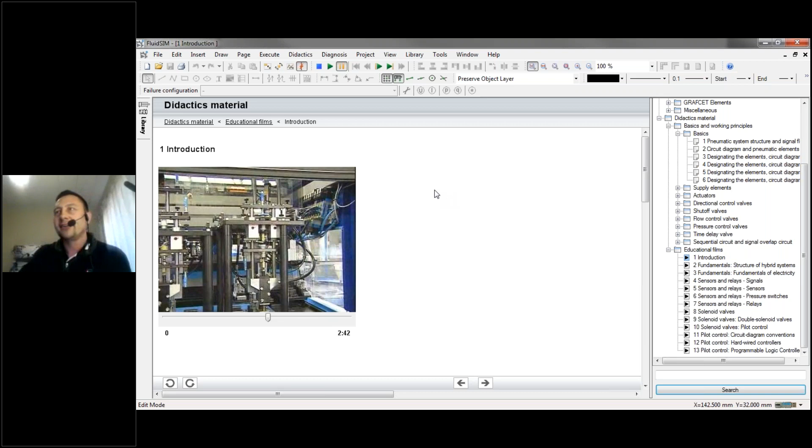Okay, Davi or anyone, just give me some heads up that you can see my screen, my video. We can see your screen and your video. Okay, thank you. So here we go. I'm going to play. Just have a look. I just want to start from the beginning. There we go. Is the audio okay? Yes, the audio is excellent, Sean. Thank you.

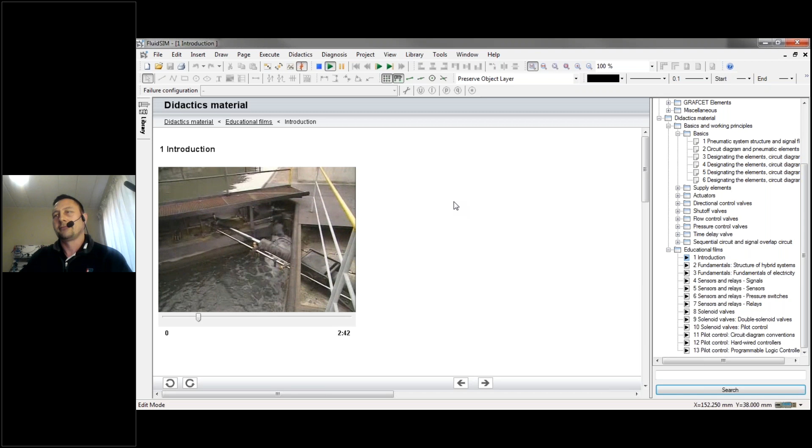What does an automatic packaging machine and this lock have in common? Let's take a look. Huge forces are required to open and close the lock gates. Force is required in two directions. Hydraulic drive is the right solution. The lock gates and the control room are far apart. This means that control signals have to be transmitted over a large distance. But a hydraulic pipe is not suitable for this. Electrical control signals, which travel via electrical cables, are the right solution here.

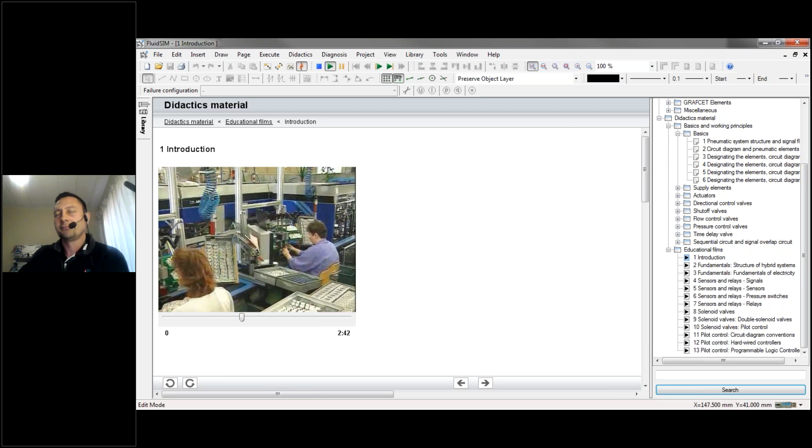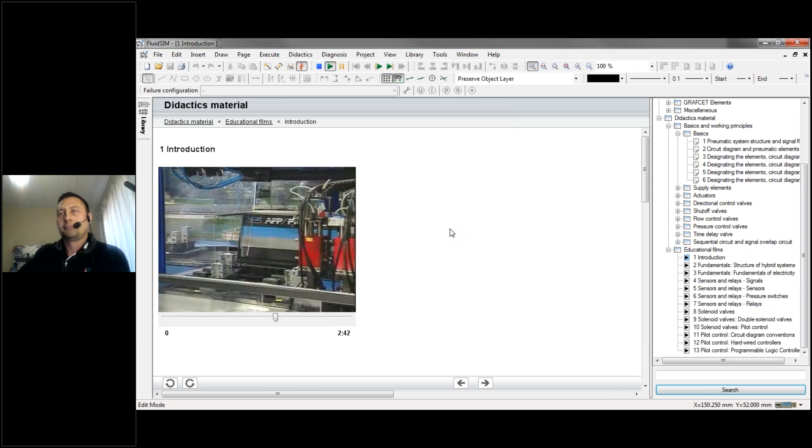In the case of these complex automatic assembly machines, it is not distance that is the primary argument against pneumatic control of the valves. In this case, it is the many control functions required in order for the entire complex program to execute. Here, too, electricity has been selected for signal transmission because it is simply more manageable. And because electricity is a prerequisite for the use of electronic open and closed loop control systems. And it allows a system to be linked to the company's data processing system.

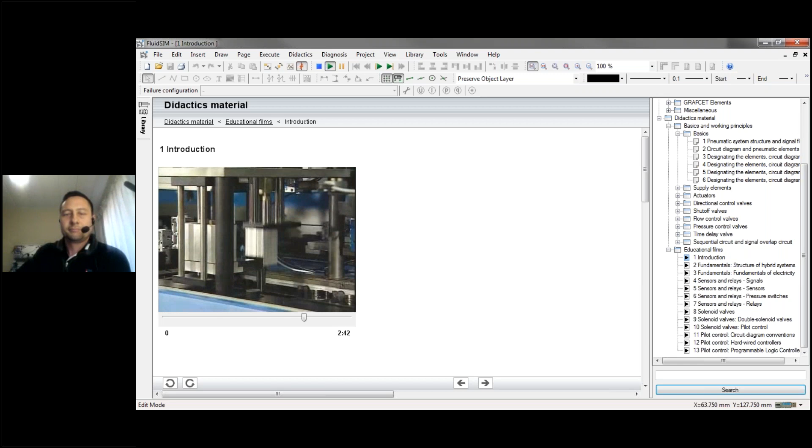In that case, why use pneumatics at all, if electricity is there anyway? Well, pneumatic drives allow linear motion to be achieved much more simply. And fast cylinder speeds can be achieved, resulting in short cycle times. In these examples, the control energy is not the same as the work energy. That is why they are called electro-pneumatics and electro-hydraulics. These are so-called hybrid systems.

Okay, so that was just a video to get you guys to understand where pneumatics are being used. So it's in industry, to automate your machinery and to make money for the companies, because a company exists to make money and to help the community. So basically I'm going to show you quickly a slideshow, and we're going to go through some of the basics that you guys need to know as you are just being introduced to pneumatics.

Having a look at the next slide of the slideshow, we can see air generation and distribution. There are always a lot of factors that need to be considered when designing and installing your systems, like storage requirements and air cleanliness, as there are many different levels of air cleanliness. It depends on your environment and the type of factory that you are in, and that determines the requirements for cleanliness, whether it's a pharmaceutical company, an FMCG or another type of company.

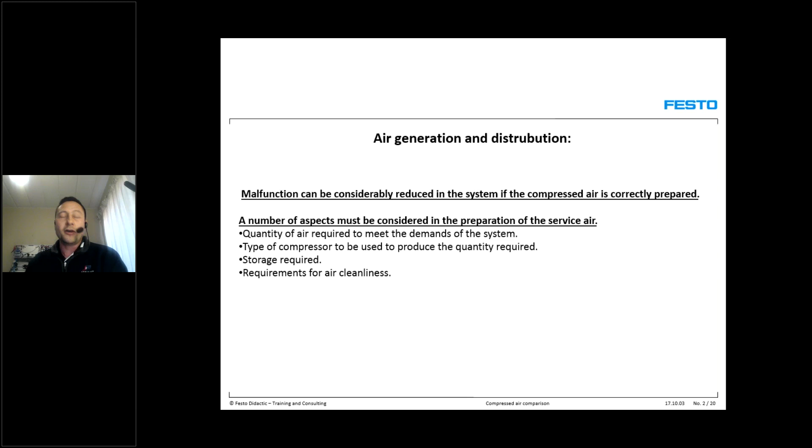Okay, so pneumatics by itself, if we just think about pneumatics, we are using compressed air to do work. We are compressing the air, and that compressed air we use to perform work, and to do it at quite high speeds.

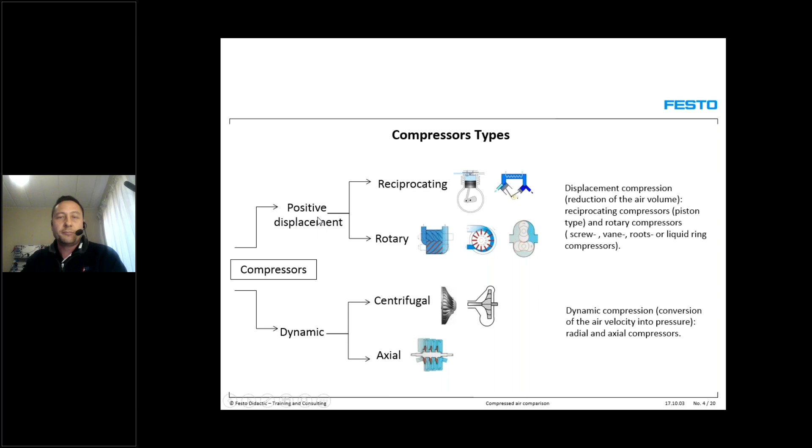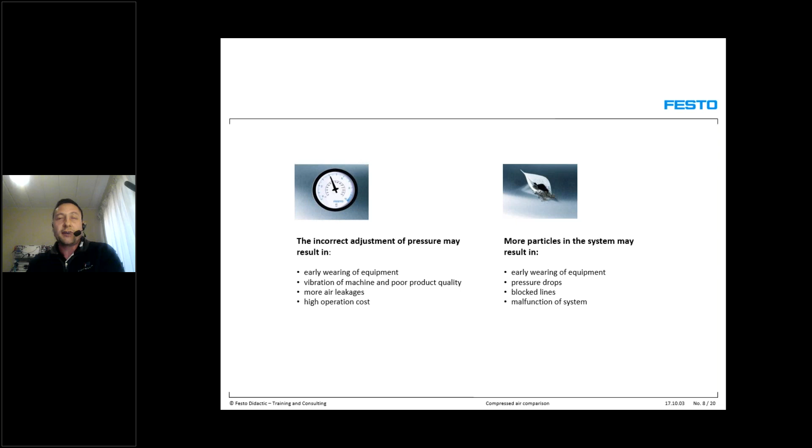There you can see it - the pressure should be correct, the particles as low as possible. You only need to allow the number of particles which is correct for your class of air, and then also you need to make sure you remove all the condensation, and lastly make sure you do not oil your system unless it should be oiled. There are certain rules that you need to keep to, to make sure you only add oil into the system when necessary.

We also cover that in our basic pneumatic course. So this is an air service unit.

Now I would like to show you these parts in practice so you don't just see some photos, but actually see it for real. Okay, so here's our air service unit. It's usually made up of a couple of components. The first thing on the left hand side, you can see there's a filter, and then something to remove condensation.

For our filter and our dust condensation, I'm going to bring in another camera to show you our unit so you can see. And then also the second thing we have here is a pressure regulator. In this case, it's a three-way pressure regulator with a gauge - there's our gauge as well.

And then thirdly, we have the lubricator, which is used for lubricating the system. We put all of these together and combine them, and then it forms one complete unit like this. If we add these up into a little square, there's our new symbol - this tells us the filter, the pressure regulator and gauge, and then the lubricator. So there we go, those are some of the components you would see in pneumatics.

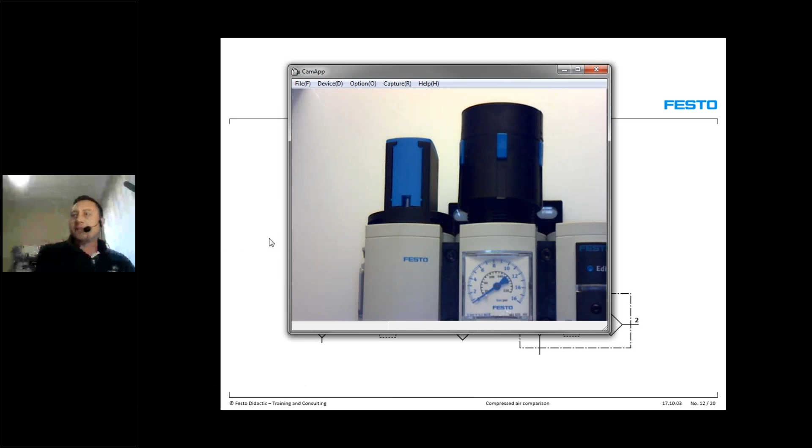If I can quickly show you my screen here - there we go. Okay, so this is just a practical, actual component here. This is our on-off valve that we have on this side. Here's our pressure gauge, here's our pressure regulator at the top.

There's a pressure switch. In this case, we have some extra units here with a branching module, and then we also have a filter at the bottom here. Okay, so in here we will replace the filter insert.

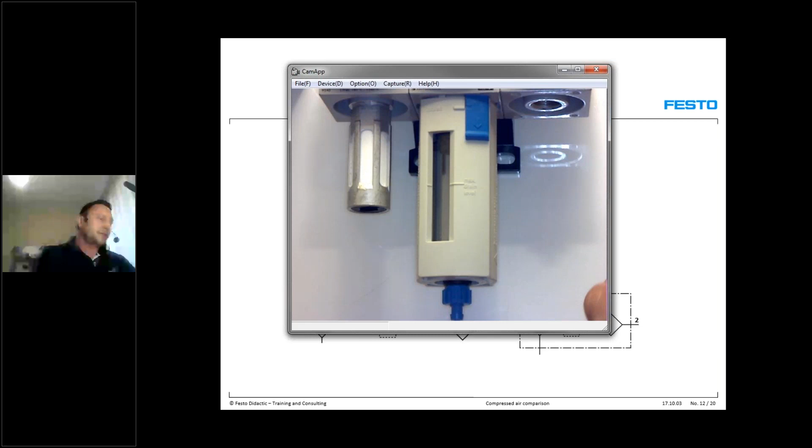This side we also have a silencer. So this is basically an air service unit that you would see in the field.

Okay, fantastic. So let's have a look at some of the details about some of these components that's actually being used in these air service units.

We go to the first one, the adjustment of pressure. This is very important. Two questions you should be asking: what is the correct pressure for the system? Like I already said, the lowest pressure that you can operate smoothly at, that is the correct pressure.

The second thing to look at is the correct flow. You need to make sure that the size of your regulator is correct and that the flow rate is correct so that it will actually allow it to pass through to the system.

Remember, if the flow rate is too low, then your cylinders would have problems if more than a certain amount of cylinders start to move at the same time. We do not want to have that problem. We also need to make sure that we have a constant flow all the time to our system.

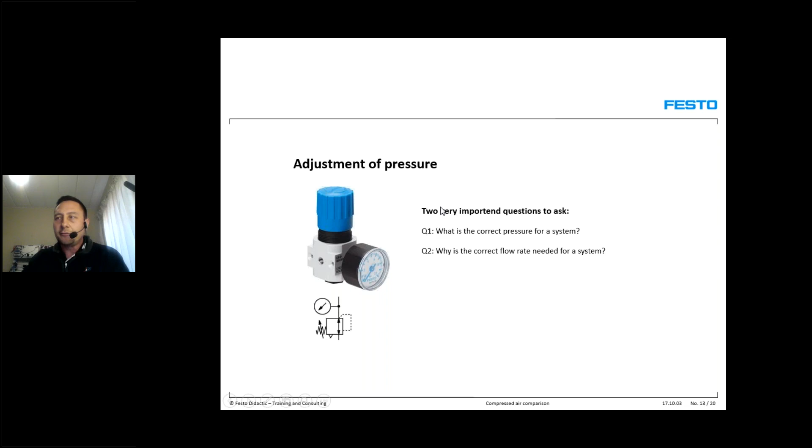So these are the two main questions you need to ask when installing your pressure regulator or doing the settings. Here's just some examples of what they look like in action in industry. Just different types, and you can see they all look different.

Then the next thing I would like to show you is some of the filters that we can find in industry. These are the five main filters that you will see in industry, from number 1 up to number 5.

The sterile filters are very small. They are used for bacteria and viruses, as you can see, and that's actually a whole new industry by itself, just working with these filters.

But for pneumatics, basically, you usually would start with 40 microns, then you would go to 5 to 1 micron, and then you would go to a microfilter, and then active carbon. So you start on the left-hand side and work your way downwards as you move through your system, through your distribution system, to get to your actual working components and your valves.

Okay, so usually this is the 40 microns, and then this is the 5 to 1 micron. This is a 0.01 micron, and then this is much smaller.

I usually make some jokes about it and say, if you have a factory that makes chips and flavorings, and it has an odor, and your employees start to eat your food, and they eat the profits, then you need to add some active carbon filters to make sure they do not get hungry while they are working on your components.

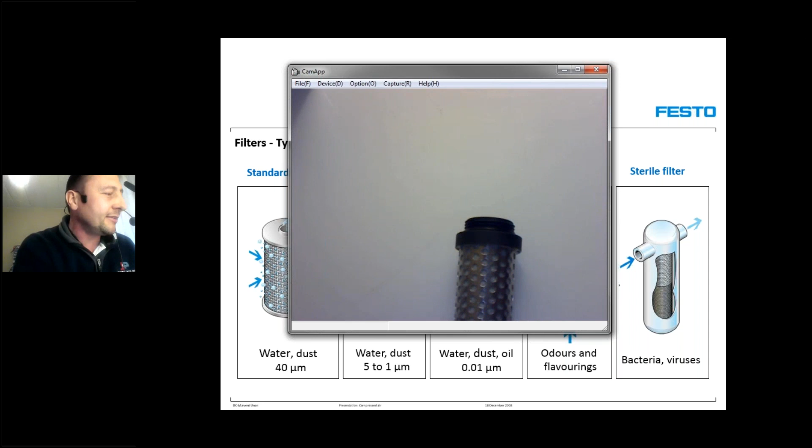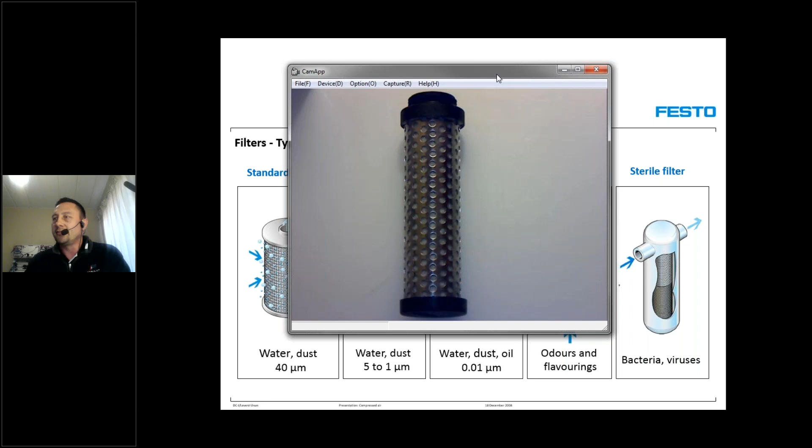But just to make it a bit more practical, I want to show you some filter inserts that we have here. This is the active carbon filter. Let me just get it in. This is the one in the back here on the right-hand side. This is the active carbon filter that we have here.

Then we also have a look at another one. Let me just close it a bit here. Here's another one. This is a fine filter that you see here.

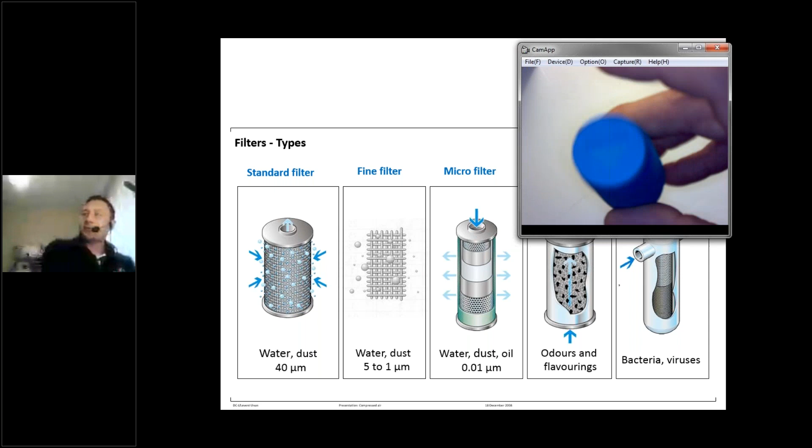If on the bottom, you will also usually be able to see the size. In this case, this is a 1 micron. It's written there at the bottom. You cannot see the camera well, it's a bit dark here at this point, but it's 1 micron, it says there, and this is your fine filter.

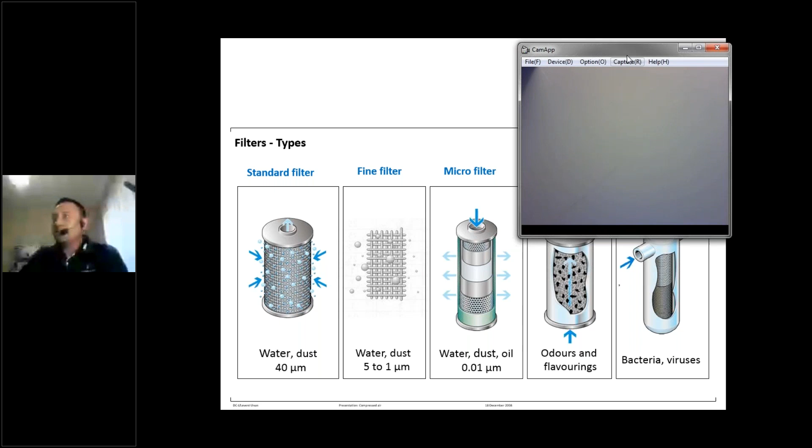Then we also have a micro filter. It looks a bit the same, but if you actually hold it in front of you, you would see it is more porous. This filter insert is more porous, and this is actually the micro filter. So yes, this is just some examples of the filter inserts that you can see.

Okay, if you have a look at the next slide. And like I said, we only have an hour and a half here to talk, so we can't tell you all the ins and outs.

We would like to spend more time with you to actually show you everything inside out.

Okay, so when to change a filter? This is usually a good question that we find in industry, and most people should know, but they don't always know: you should actually install some indicator for pressure drop. If there's a pressure drop over your filter line, it means your filter is blocked. So if you have a high pressure coming in and a lower pressure leaving the filter, then you actually have a problem. Then you need to start replacing your filter insert. Otherwise, your filter insert will become more blocked and clogged, and that will cause more problems downstream in the system.

Okay, then we also have the lubricator. Like I already said, there's a certain type of oil that you're going to use in a lubricator. And if we look here, this is a hydraulic oil with that viscosity. You can write it down now if you need to. If you don't know, please write it down. It's 32 square millimeters per second. And so that is the thickness of the oil. So the oil viscosity should not be anything else but that. So please make sure your oiling is done correctly with the correct oil.

Also, the other thing I mentioned earlier on was that you need to make sure that when you're oiling, you're doing it at the correct time, and for the correct reasons. Please remember that most of the valves that you are buying these days are already pre-lubricated by the manufacturer, so you do not have to lubricate unless you meet certain conditions. Then you would need to add a lubricator as well.

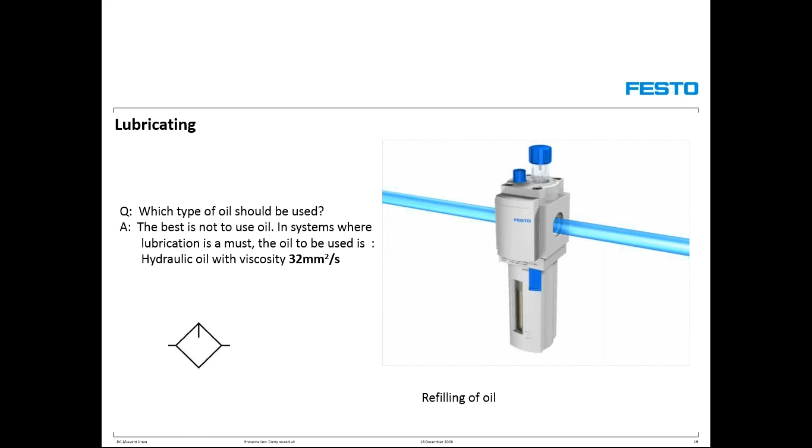But before you do that, I would recommend that you get one of our sales engineers to come and have a look at your system and make sure that you actually need to lubricate your system. Otherwise, if you start lubricating, you will have to keep lubricating it yourself.

Okay, fantastic. This is just to show you where you can actually adjust your oiling system. There you can see there's a plus on that side, minus this side. There's the way the oil will drop in. This is a chamber, and this is just to show you the lubricator from the top.

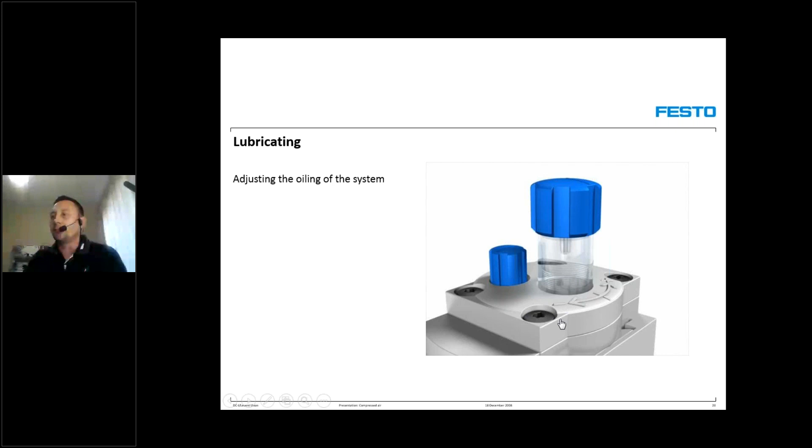Okay, then just some tubing and fittings. I'm not going to talk a lot about this, but just to show you some things. Of most tubing damage, as you can see, only 10% comes from mechanical damage. The rest is because you use the wrong tubing in the incorrect environments.

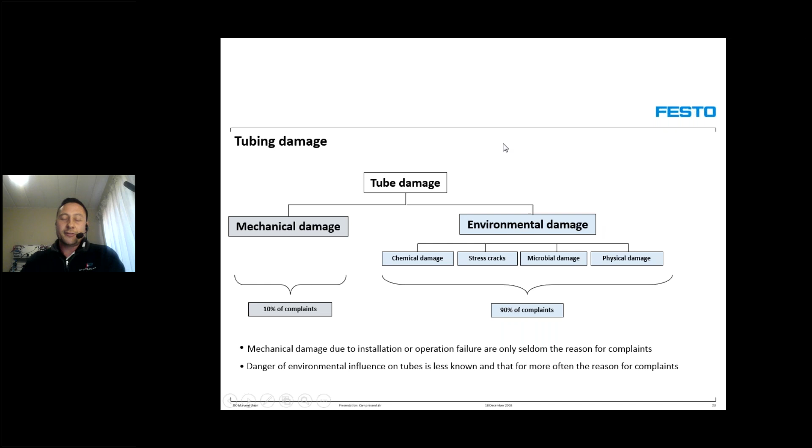So all of these are places where leakages can take place, and there is always a certain amount of leakage that does take place. But making sure you reduce the amount of leakages is a very good idea, because you would increase the profitability of the company.

And then there are obviously different ways to detect your leaks. In this case, the easiest and the cheapest way to detect leaks is to use a soap solution. You just spray it on, and you can see where the bubbles start to show, and then you know there is a leak.

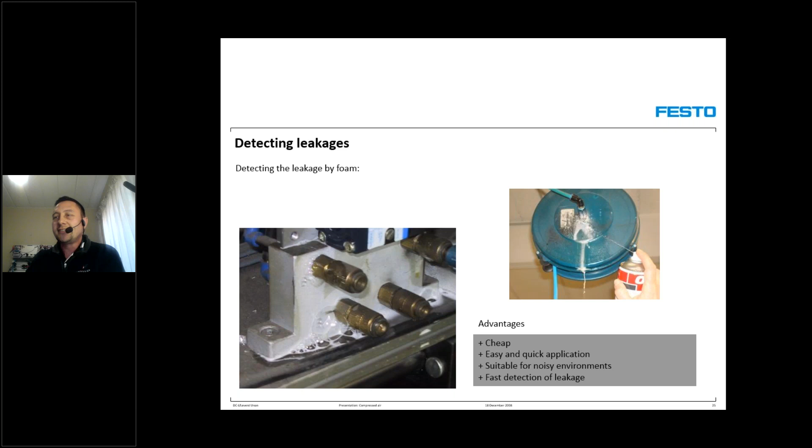Okay, so always remember to reduce the leakage. We do not want leaks in our factories. We want to make sure that we maintain a proper flow, proper pressure, everything, and without any leaks. The more leaks you have, the less profitable your system becomes.

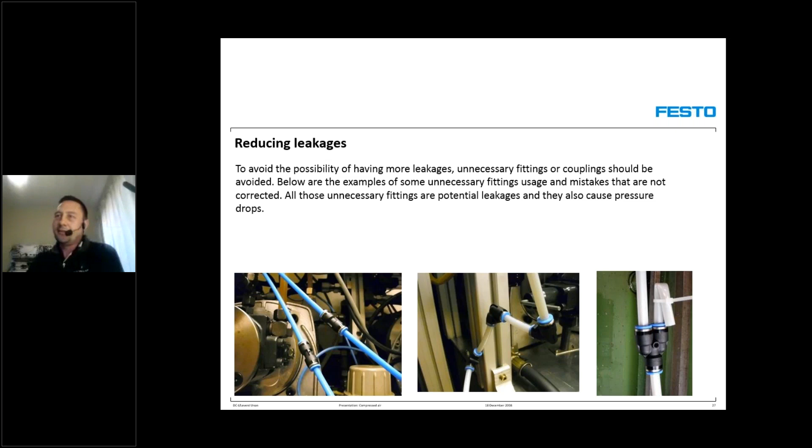Okay, fantastic. So let's have a look at some of the symbols, because we will be designing and showing you some components today as well, within the next hour or so. And so you need to know some of the symbology. Okay, so the first thing that you need to know about is the relationship that exists between pressure, volume, and temperature, and there's also a relationship that exists between force, pressure, and area. Okay, so the first thing, for volume and pressure, I would like to play a small simulation I have here.

Here we go. Okay, so pressure and volume. So you can see the pressure is at the moment low, and we have maximum volume. Okay, but as I bring this piston down, I'm going to start to put pressure on the container. I'm going to build pressure inside the container, and then there will be a pressure being developed. So let's quickly have a look. So there we go. So pressure and volume, they work together.

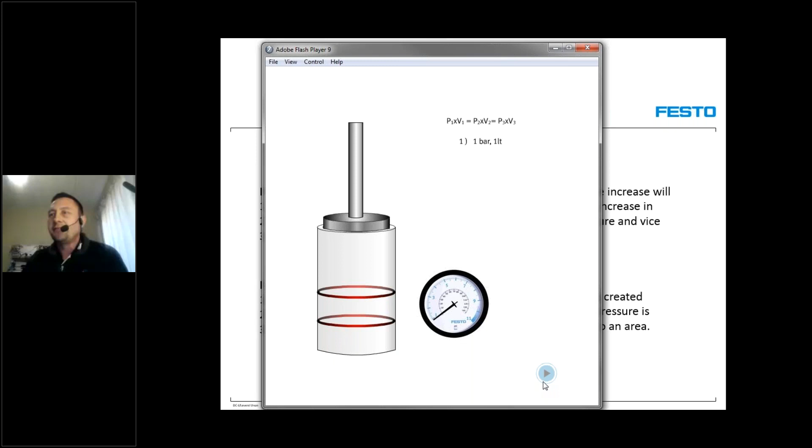Okay, so the first one, we have 1 bar being applied to 1 liter of volume. So you can see the pressure at the moment. Okay, so now let's halve the volume. So the volume is now half a liter, and you can see the pressure doubled. If we do it again, and we halve the volume again, now it's 1/4 of a liter, and we can see it's 4 bar. So you can see that the pressure went up proportionally as the volume decreased.

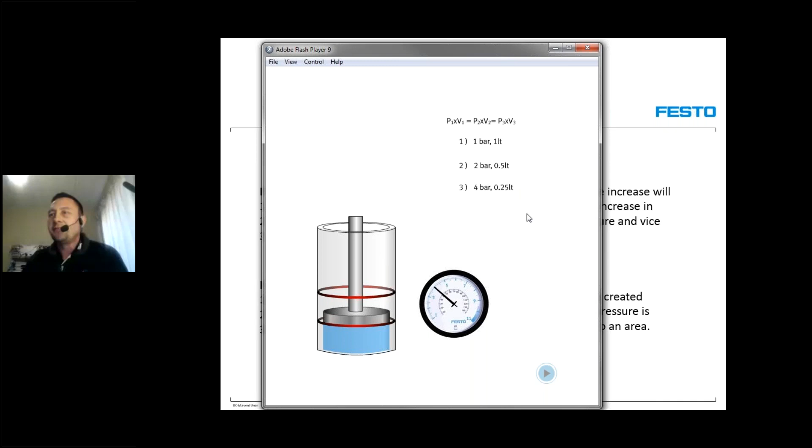So this is one of the main principles of pneumatics. And remember, we're using it to do work. Okay, but this is important to remember when you actually work with pneumatics, as this can cause some problems if you do not maintain this relationship. Okay, let me quickly show you another simulation as well.

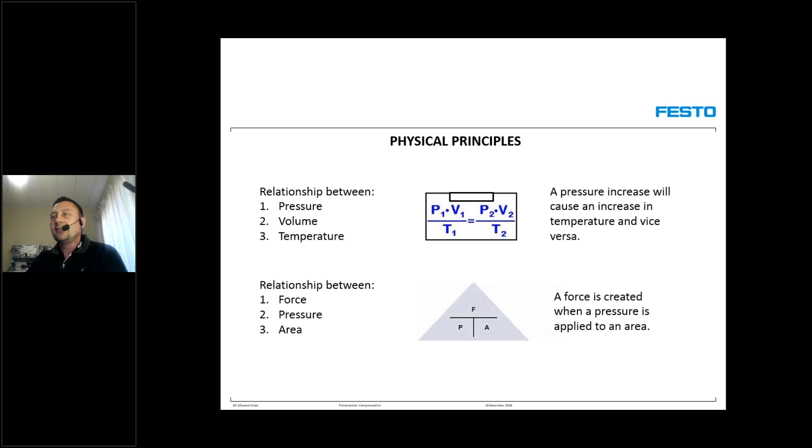Okay, so if we look at the second one, the relationship between force, pressure, and area, to create a force, we need to apply pressure to an area. Okay, so if we apply pressure to an area, then we will have a force, and a force can actually perform work. So in other words, if we look at the size of a cylinder, the larger the cylinder is, the more force we would have.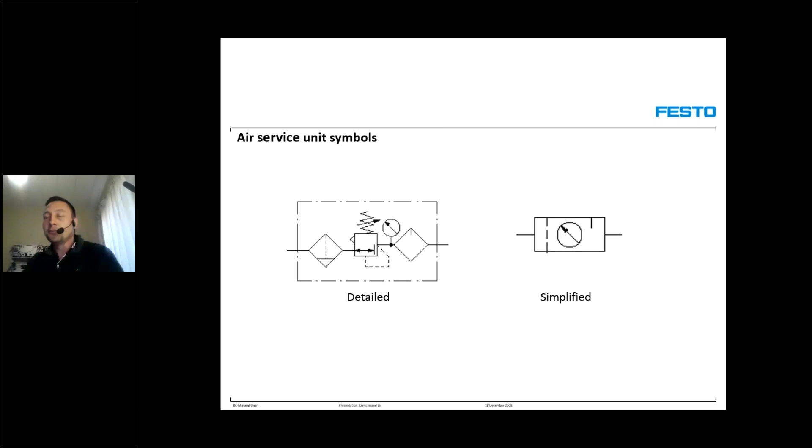But this is detailed. If you add more modules into your air service unit, then you would add more of the symbols. So this is the filter, this is our regulator with a gauge, and this is our lubricator. Remember, if you come for the basic pneumatics course, we will go through this again and in more detail as well.

Okay, so then we are also going to have a look at some cylinders today. We are basically going to look at the single acting cylinders. Single acting cylinders normally have a spring in the front area, and they return because of the spring force pushing against the cylinder, moving it backwards. A double acting cylinder, you can see, has got 2 ports. The single acting only has got 1 port.

So if I apply pressure here in the back, the cylinder rod will move forward and overcome the spring tension. Once I remove the air from the back, the spring will push the cylinder back to its original position. On the double acting cylinder, we have 2 ports. If I apply pressure to the back, the cylinder would move to the front. If I apply pressure to the front, the cylinder would move to the back.

Okay, so just to make that a little bit clearer so that you guys can understand, let me quickly get another simulation here, just to make it easy to see, because I know the mechanical guys like to see to believe.

Okay, so let me quickly bring you a double acting cylinder. There's a double acting cylinder. If I apply pressure from the back, the cylinder would move forward. If I apply pressure to the front, the cylinder would move back. Okay, so that's our double acting cylinder. Let me quickly see if I have a single acting here for you as well.

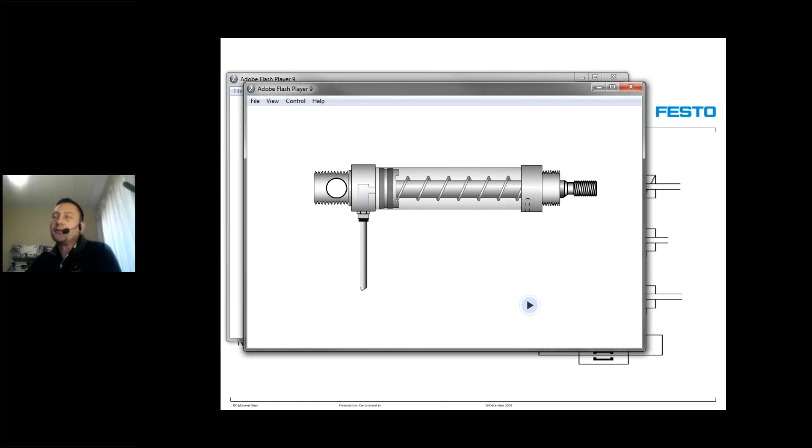Okay, here we go. Our single acting cylinder. You can see there's a spring in the front, and that's keeping the cylinder in the retracted position. Now if I apply pressure, the pressure in the back of the cylinder would overcome the spring tension in the front, and it would move the rod to the front. If I remove the air, the cylinder's spring would return it to its retracted position.

Okay, fantastic. So this is our single acting cylinder, which only has one port. The double acting cylinder has two ports. You can see one and another. Perfect. Then there are also other types of double acting cylinders available in industry. I'm not going to go into detail on these now, but the two we're going to be using today are the single acting and the double acting cylinders, just to build a few circuits and to demonstrate what you can expect to see in the courses as well.

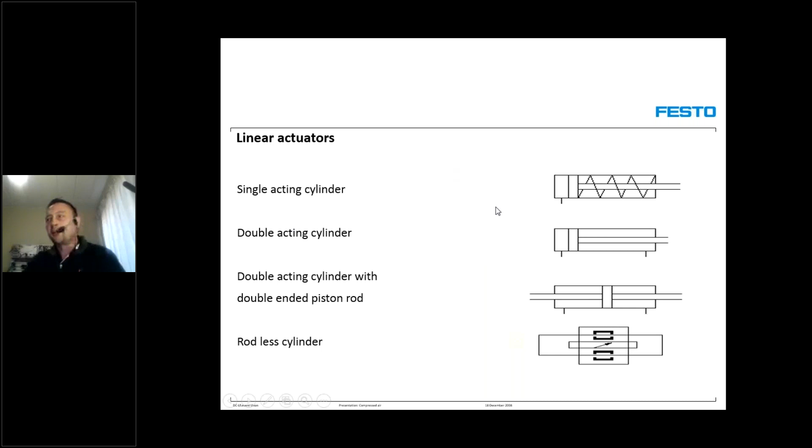Okay, so let me quickly see if I have a cushioning simulation for you. Is there any questions at the moment? Hannes, have we received anything in the chat yet while I'm looking for my cushioning here?

And this one, we won't be working with these today. But we will definitely be working with the double acting cylinders and the single acting cylinders that I'm going to show you. And we're going to play with that a bit.

Okay, then we also have exhaust ports. An exhaust port is what you would usually have on a valve, because we use the compressed air to do the work. After the work has been performed, the air should be released again. So to get it out of the system, we need to exhaust it back to atmosphere. Okay, so if we see just a little triangle like this, that means it's an exhaust port

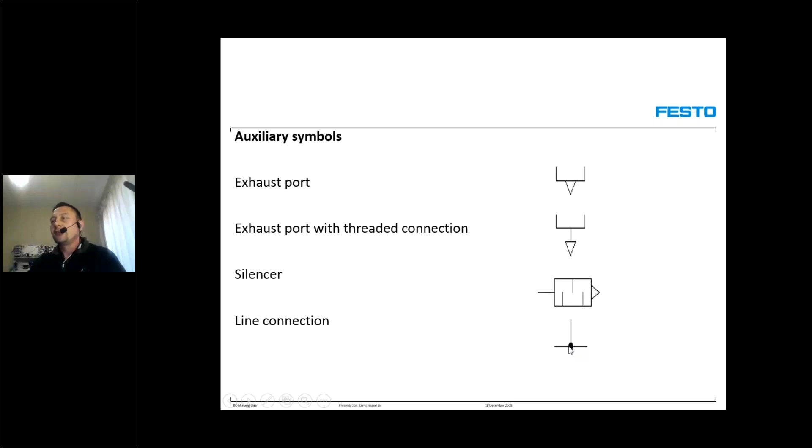Then the next thing you also need to remember is when you make line connections, to show that the line is connected, it means you're using a T-piece in this case, and that means you can connect 3 pipes to one node or one point, and that means you need to put a dot. If there's no dot here, it means the lines would be crossing one another. But if there is a dot there, the lines are not crossing, they are connected together using a T-piece or other type of component.

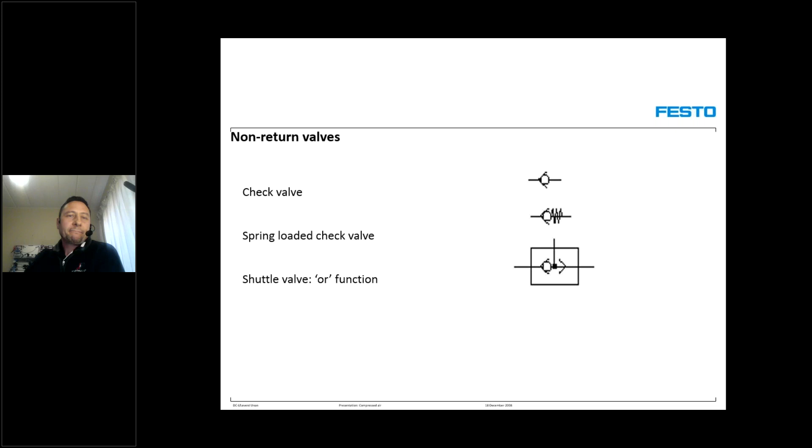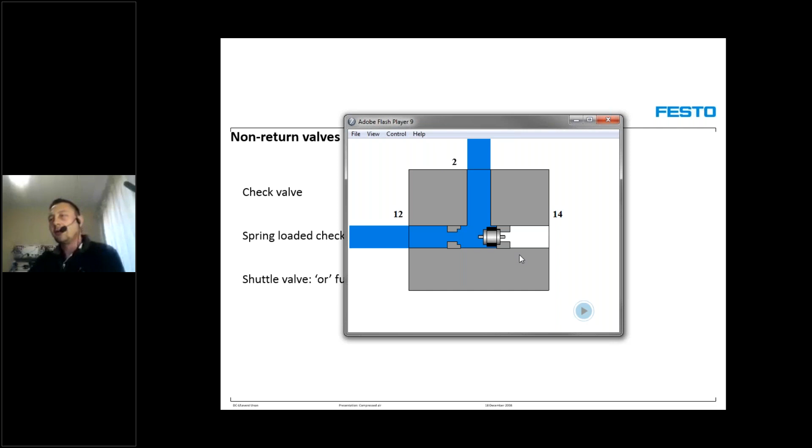Okay, just an OR valve, to show you: if we get a signal from the right-hand side, it will pass through to the output. If there's a signal coming from the left-hand side, it will pass to the output. And if you have two signals, the one with the highest pressure would pass through, the one with the lowest pressure would not. So that is our OR valve, or our OR function, also called the shuttle valve.

If we look at the next symbol, we've got the two pressure valve, which is an AND function, also called an AND valve. We'll also be using this in our basic pneumatic course, and there are a few circuits you'll build using them. The AND valve basically needs two inputs before you can have an output.

So this is our valve. If we get one signal from the right-hand side, it's blocked. If we get one signal from the left-hand side, it's blocked. If we get two signals from both sides, then one of the signals will pass through and the other will be blocked. So for this valve to work, we need two inputs to get an output. That is our AND valve. So one signal only would not allow output, two inputs would allow an output.

And we also use this in the basic pneumatics course, as well as this quick exhaust valve. There will be instances in pneumatics where you'd like to move your cylinder faster than the normal speed it returns or moves forward. For that reason, we'd use a quick exhaust valve, which would exhaust all the air in the cylinder much quicker to the atmosphere, so your cylinder can get rid of the air faster and move at a faster rate. That means you might save some production time on your machine, and time means money. So that's good for the boss.

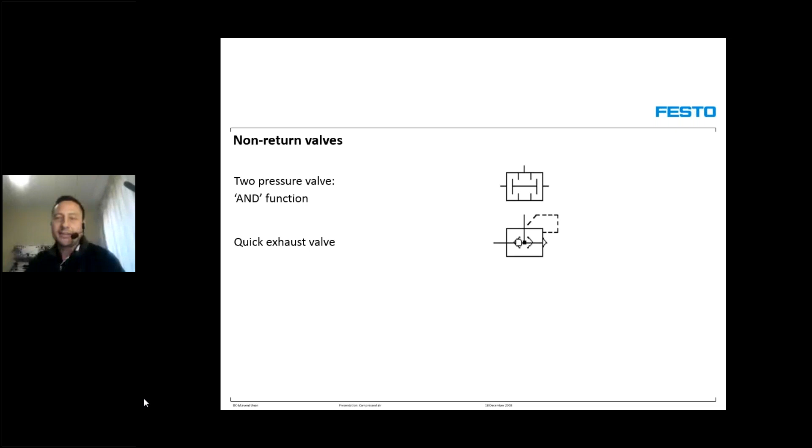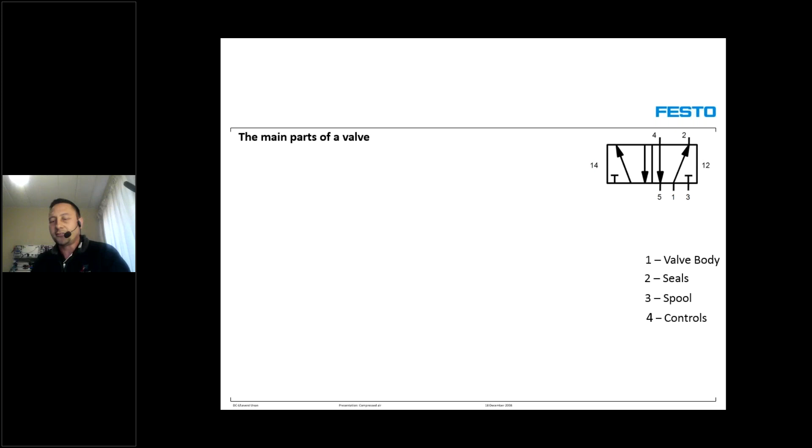So looking at valve construction, something also to remember is what a valve is made up of. It's got a few parts that are put together to actually construct a valve. And the first one is the valve body itself.

In this case, I'm going to explain this to you, we'll have a look at it. This is a 5/2-way valve. The 5/2-way valve has 5 ports, and you can see there are 2 positions, one on the left and one on the right. So there are 2 squares, meaning 2 positions, 5 ports: 1, 2, 3, 4, 5 ports, and 2 positions, 2 squares.

So you'll have the valve body for the 5/2-way valve, for instance, as an example, and then you'll also have seals. The seals would actually create chambers before each port. So these are the ports: 1, 2, 3, 4, 5.

It's the same ports that you see here. This is a symbol for the actual valve. You would have the seals, and you would also have a spool. This part is the only part in the valve that actually moves and makes a change, so that the air can change direction. In this case, if it's a 5 two-way, it would change between 1 to 2, sending the air from 1 to 2 or 1 to 4, exhausting 2 to 3 or 4 to 5, depending on the direction that your spool moves to.

Then you also have controls, which is number 12 and number 14, which most people do not know. They just think it's a number, but 14 actually tells me I'm going to connect - if I put pressure on the left-hand side here, I'm going to connect number 1 to 4. If I put pressure on number 12 here, I'm going to connect number 1 to 2. So that's actually what 12 and 14 means. It's not 12 and 14, but it tells me 1 connects to 4 and 1 connects to 2. That's actually what it means.

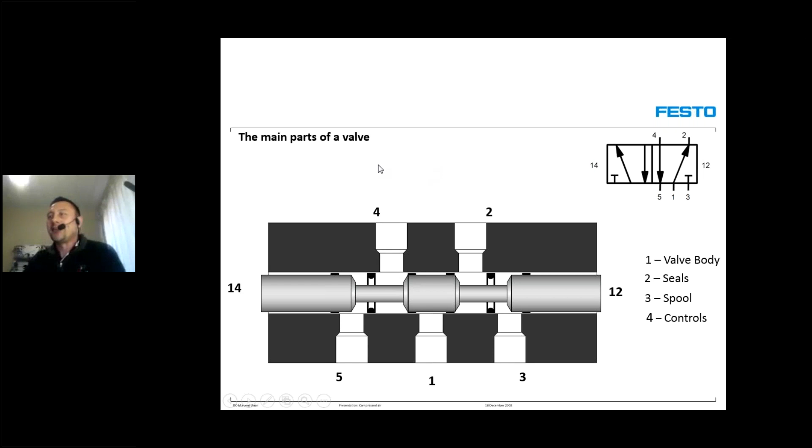I'm sure you guys have already learned something today. There are also a lot of other ways you can actually actuate your valves. On the left-hand side, we have all the manual methods that you can use to actuate your valve. In general, you would use this symbol, which means it can actually be any of these - it's just a general symbol.

But if it's a push button and you want to be specific, you can use these other symbols specifically to state exactly what you are using. This is just a general manual actuation symbol.

Secondly, for the mechanical actuation, we normally use a spring return as a return on a valve. So once the air disappears on the left-hand side, for instance, the spring would return it on the right-hand side. I will play you some simulations now just to make this clear.

Then also what you might have is a mechanical pin. You need a mechanical actuation or mechanical contact, actual contact from the cylinder to push against the pin to open or close your valve. The same as the roller - you might have a roller which might be on a roller limit switch or limit valve, and that should open or close your valve.

And if you're doing electric, or you're going to sit with us on the electro-pneumatic course, then this is one of the things that you will also be using - it is a solenoid, and there are special types of solenoids as well available.

This is just a basic symbol for pneumatic actuation. So this is to show that if I apply pressure to this side, then it's going to send pressure to my valve here. But we will have a look at that quickly.

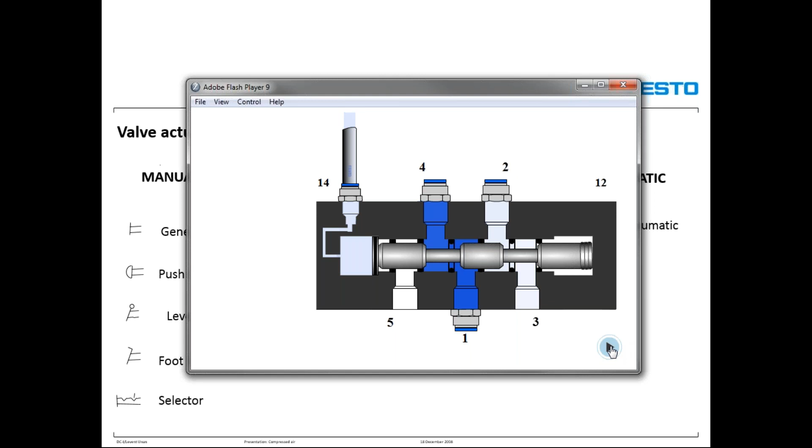So let me just release the air, and there you can see the spring takes over, which is number 12, and it connects number 1 to 2. So air will flow from 1 to 2. If I apply pressure to 14, I connect pressure from 1 to 4, port number 1 to number 4. That is just to give you an explanation of what we are talking about at the moment.

Let me just see if I have another valve here, just without any springs - a normal 5 two-way valve. There we go.

Okay, so from the left 14, I'm going to connect number 1 to 4. I connect 1 to 4, but I exhaust 2 to 3. Okay, if I give a signal to number 12 and I take it away from 14, let's see what happens. I connect number 1 to 2 because it's 12, and I connect 4 to 5. So 4 exhausts to number 5, and pressure is applied from number 1 to 2.

As a general rule, we usually say number 1 is your pressure, number 2 and 4 is your working lines, number 12 and 14 would be your signal, your pilot control in this case, and number 3 and 5 would be your exhausts. So 1 is pressure, 2 and 4 is working lines, 3 and 5 is exhaust, and 12 and 14 would be the control.

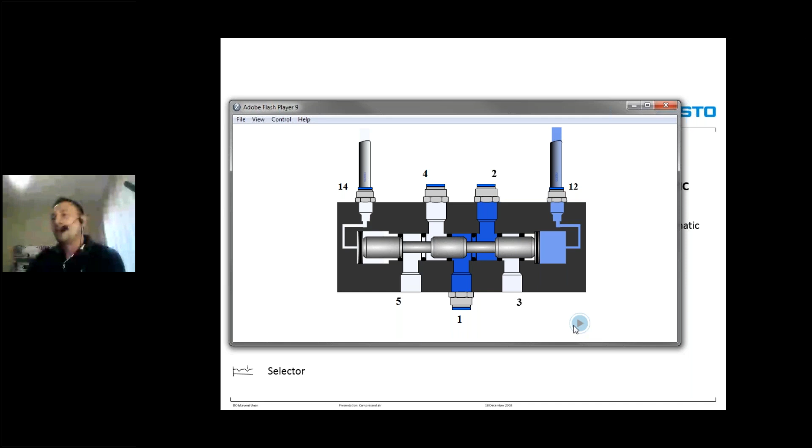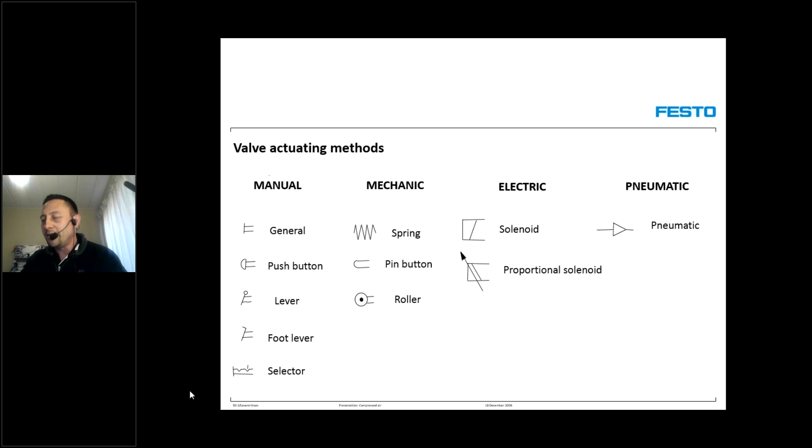And that is basically how you can look at a valve and what the valve consists of. Okay, so if we look at the next slide, just to help you a little bit, and if you have a pen and paper with you, you can make some notes. I know there's a lot of information we can give you, but we are a bit limited on time today.

Number 1 here, you can see we always look at the number of ports. Let me bring in a valve again, then we can have a look and compare it to what we see here. Okay, so here's a valve. How many ports do we see? It's 1, 2, 3, 4, 5. So that means 5 ports.

How many positions do we have? It's either the spring's position to push it into the left-hand side, or if I give a signal to 14, it will push it to the right-hand side. So there's one position, and there's another position. So there's 2 positions here on this valve. Okay, so we have 5 ports and 2 positions. That means a 5 two-way valve.

A 5 two-way valve. What is the condition of this valve? We will look at that as well when we look at our circuit, when we start designing. But in this case, this valve is a directional control valve. It's not normally open or normally closed, but it is a directional control, because if we had to connect this to a cylinder, it would either move the cylinder to the front to extend, or bring it back to retract.

Okay, so next thing we need to look at is the method of actuation. How do I actuate this valve? How do I get it to change the position? It is by means of direct pneumatic actuation. So I'm bringing in air. Remember, pneuma means air, okay? Pneumatic, that's where it comes from. Pneuma, pneumatics, okay? So pneuma means air, and when the air comes in, air will actuate my valve. So it's direct pneumatic actuation. So there we go, if the air comes in, I actuate my valve.

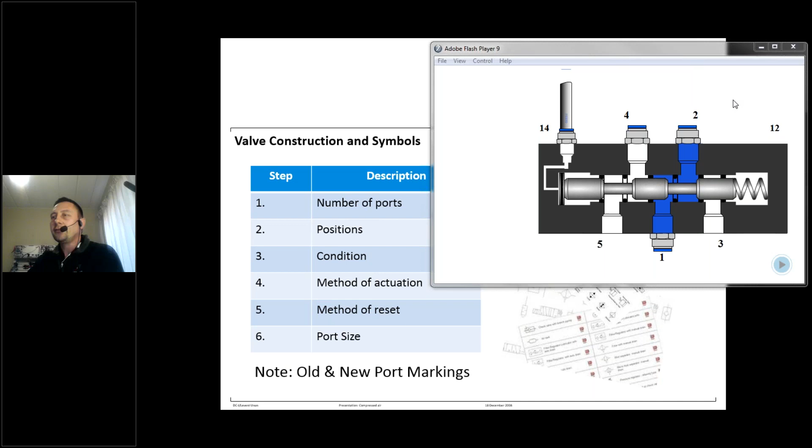So I would recommend you try doing that and you follow these rules. We do go over these steps again when you actually do the basic pneumatics course with us. Okay, so let's have a look at some of the circuits, just to have a look at some of the components that we're going to look at today, so that we can discuss them.

Okay, so I'm going to bring in my drawing program. This is called FluidSim. On Friday, we actually will be running this FluidSim introduction, so that when you come and do the basic pneumatic course or any of the other courses that we offer, you will have to draw circuits on FluidSim, our drawing package. So once you register and pay for the course, we're going to be sending you this package for free with a 3-month license, so that you can join us in class and do some practical exercises.

Okay, so this is our library. You can see there is pneumatics, there's hydraulics, a whole bunch of things that you can look at and work with. But in this case, we're just going to work with pneumatics. So first things first, we're going to get some cylinders. There are many cylinders to choose from and many different types available, and it depends on the application. But for our circuits, we're going to keep it simple and straightforward, build some different circuits and see what they do.

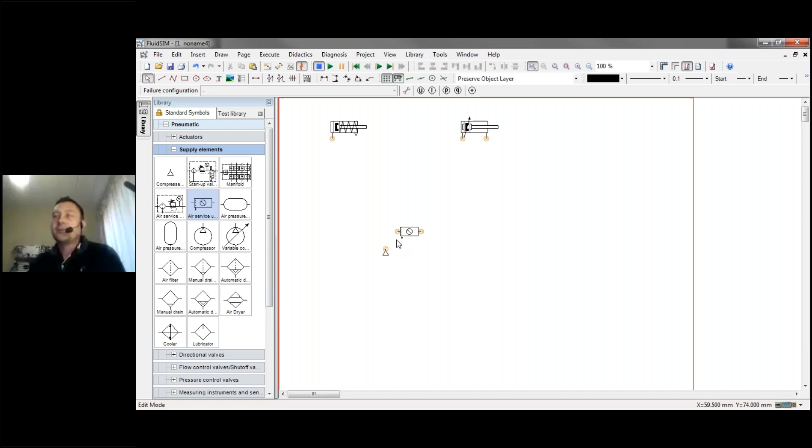So here we can connect our compressor to our air service unit. The compressor supplies the compressed air to the air service unit, which cleans the air, and then the output goes into your system of control. So if we look at this system here, this is a single acting cylinder, and if I connect this directly to the air service unit, once I start to simulate, you see, there we go. The cylinder moves forward, and that's it. There's no control.

We cannot control it unless we actually get ourselves a directional control valve. There are many different types of control valves available that you can drag in, and it depends again on your application. What do you want to do? So there's 3 different valves. Let's try the first valve. This is a two-way valve, and we're going to add it into our circuit. Let's work on the actuation method and the return. So let's give it a spring to return, and actuate it by a push button.

So let's see if this valve would work with a single acting cylinder. If I push the button, the cylinder extends, but if I let go, it still stays there. The question is why? The answer is because the air is still stuck in the back of the cylinder. It does not go anywhere. You built the pressure in the back of the cylinder, and it's still overcoming the spring tension, so the cylinder stays in the extended position. You cannot get it back.

Look, there's no way to get it back. So in this case, actually, it tells you that's the incorrect valve to use. Okay, so let's go and get ourselves another valve. So if we had to use this valve, let's see. In this valve, what do we see? We have a number 1, 2, and 3. On this valve, we only had number 1 and 2.

So on this valve, we had a two-way valve. Two ports and two positions. So that means number 1 is usually pressure. Number 2 is your working line. There was no exhaust, no number 3. But this one actually has a number 3. You can see we're already connecting the line of the back of the cylinder to an exhaust.

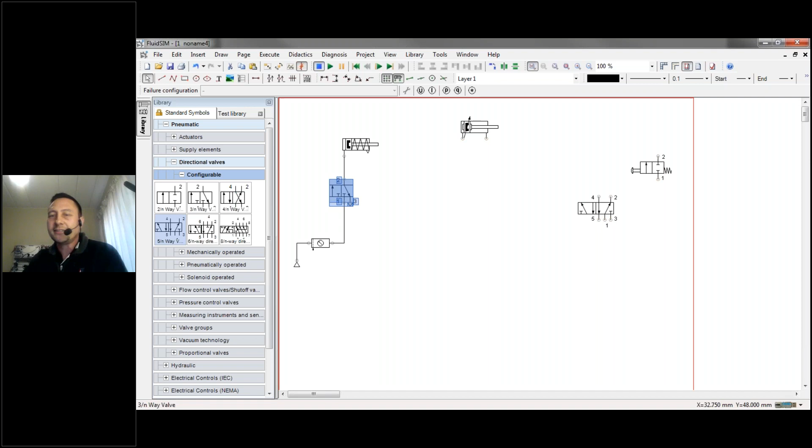So like I told you, I'm going to show you here. You can go and pick your exhaust. So here's a normal exhaust. Here's an exhaust with a thread, or you can go and add some silencers on your valve. So let's say we just put a normal exhaust there, which is threaded, and let's give it the same components that we just had. So let's go and add.

How's it now? Hello? Is there someone with a question? Hello?

Hello? No one. Okay, then let's also give it a push button again. So we have a push button actuated with a spring return. There we go. So if we simulate now, what would happen? Let's have a look. We have supplied air and it's been pressurized. I push the button, I let the air flow to the back of the cylinder and the cylinder extends. It overcomes the spring and the cylinder extends.

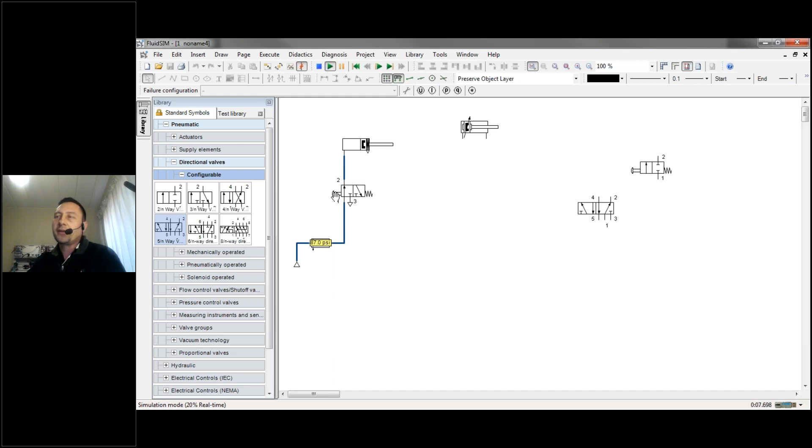But if I let go of this valve, what would happen now? There we go. The air is exhausting to the exhaust, port number 3. So the air can get out again. That means the spring can return the cylinder to its retracted position. Let me play it again. I push the button, I open the line from the pressure line to the working line going to the cylinder. If I let go of the valve button, I actually connect the back of the cylinder. The air can flow to exhaust, which is on port number 3.

So this looks like a very good valve to use. This one makes the most sense so far. Let's go and get another valve and let's put this valve in here. Let's see what this valve would do. Sorry, let me just remove. This must go to number 1. So number 1 is always your pressure line. Number 2 and 4 are working ports. Then we have 3 and 5, which would be exhausts.

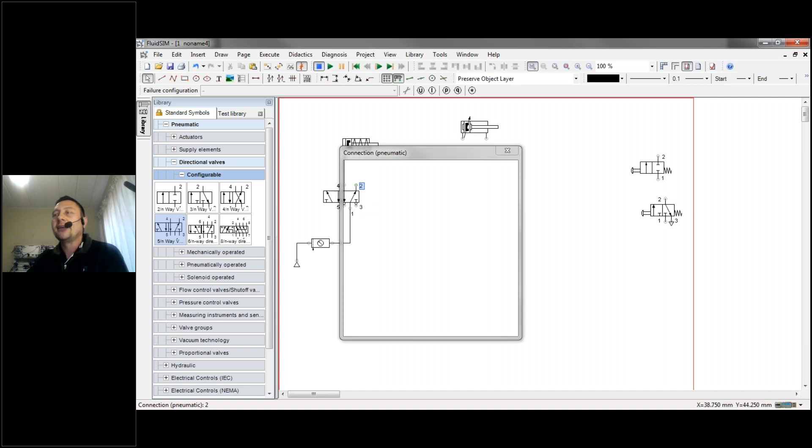So again, let's add some exhausts to our circuit here. Remember, guys, I'm just keeping it nice and simple, so if you have questions, you must ask, because not everybody is familiar with this technology yet. And if you do the basic pneumatic course, you would definitely be more knowledgeable about it than most people. Okay, good. So here we go.

So what I had to do with number 2 here, because it didn't go anywhere, I had to block it. Let me take it away and show you what happens if I do not block it, without doing anything yet. If I start it up now and simulate, you will see that the air passes through and I'm wasting compressed air, just blowing it out into atmosphere because 2 is open. So that means the air is just going to be wasted.

And compressed air costs money. The compressor is working hard. It costs electricity to keep it running, to actually build up a pressure in the line. So we need to block number 2 so that we can actually build up pressure. So if I simulate it now after I blocked it, you will see that the pressure can actually build up. There we go. You can see we have a dark blue line here. That means it's pressurized and we have full pressure now.

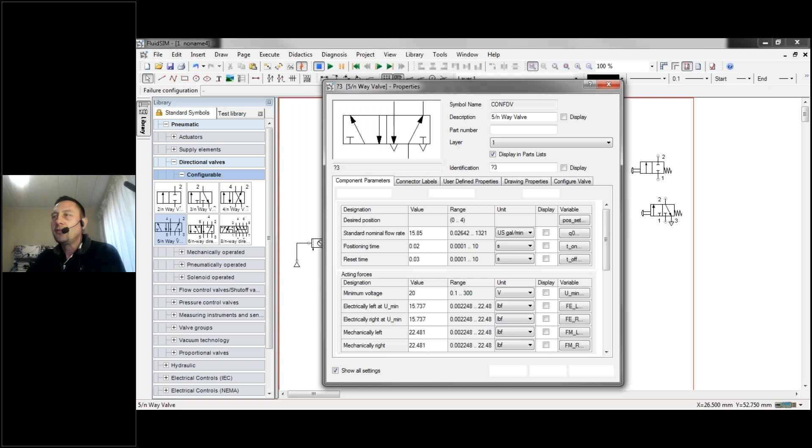So now let's go on with the valve and add actuation and reset to the valve. Let's do that quickly. Again, the same thing as we've done before. We add a spring return and a push button. There we go. So let's see if this works. Let's have a look. I push the button now.

Would the cylinder move? Yes, I'm connecting 1 to 4. So the cylinder can move forward. If I let go, the spring returns the valve to its original position. And you can see the back of the cylinder, all the air exhausts to atmosphere. There we go. And if I do that, there we go. Okay, fantastic.

Okay, any questions, guys? You guys must ask questions. So I need to have some questions here. If you want to think about these valves or know more about them, now is the time to ask, because time flies when you're having fun. So you need to ask questions if you have any. Please ask.

Okay. So here we have a double acting cylinder now. And now you can see we do not have just 1 port. We actually have 2 ports. So obviously the circuit would have to look a bit different than the previous one we had. Okay, so now let's design a circuit for this cylinder. So now we need more than 1 valve, obviously.

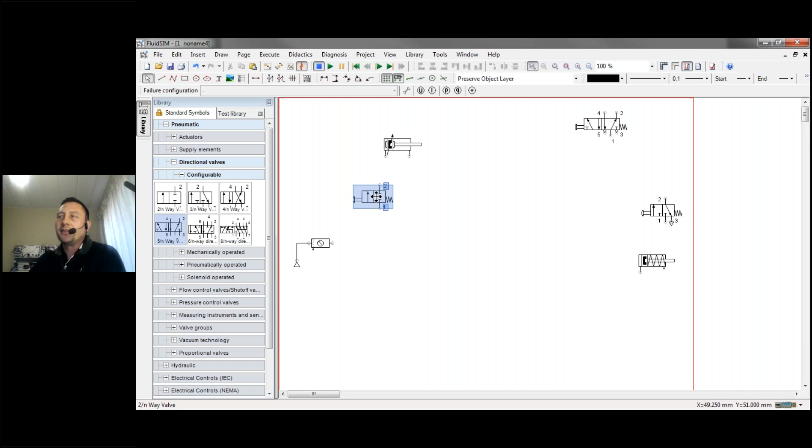Okay, so let's say we're going to use 2 of these. Can we use 2 of these? I wonder. Okay, so let's do that. And there we go. Okay, so let's put this in and see if we can use 2 valves to make the cylinder operate. Okay, let's simulate.

Okay, here we go. We have pressure on both sides. If I put pressure to the back, it moves to the front. But it doesn't even meet. I'm struggling to get to the front there. Okay, let me close. Oh, okay, no. Okay, now we have a problem, because you can see that we actually

we've pushed pressurized air into the back line here, and now that pressure is maintained because I'm blocking it. The air cannot come out. The air goes nowhere. So even if I open it, the air still pushes into the space. So that pressure is maintained.

Now, what if I push this one? I put more pressure on the opposite side as well, the same pressure. So it means it's pressure against pressure, the same pressure on both sides. So that means my cylinder cannot move anywhere. I need to remove some of the air in the cylinder to actually move it in either one direction.

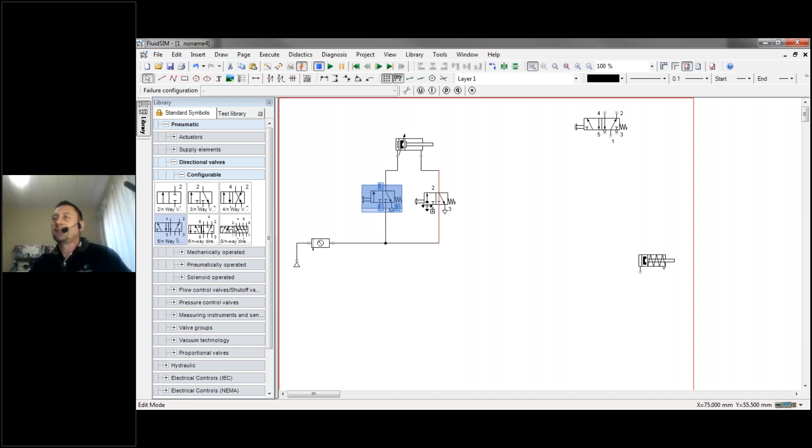So let's change the valve type. We can remove that one, and we bring in 2 of these. Okay, so here's 1 valve, and if I take another one, and there we go. Now we have 2 valves. Let's see if this operates, if this works better. Okay, so air pressurizing both valves at the same time.

If I push this button, I allow air to pass through to the back of the cylinder. The cylinder moves forward. It pushes my product into place. The air in the front can exhaust. Fantastic, this works. Okay, let me let go of that. We now let go of the button. I also release the air in the back.

That's fantastic. So in other words, if I actually apply air to the front, pressure to the front here, I should be able to see movement to the back. Yes, there we go. And again, if I let go of the button, I exhaust all the air to the exhaust. Fantastic. Okay, does that make sense, guys? Anyone? Did everybody see everything?

Okay, I'm just going to take this and make it a bit more practical. I'm going to show you a simulation of what we've done in the first circuit. So for the single acting cylinder, this is basically, in reality, if I had to cut my valve open and I had to cut my cylinder open, this is what it would look like.

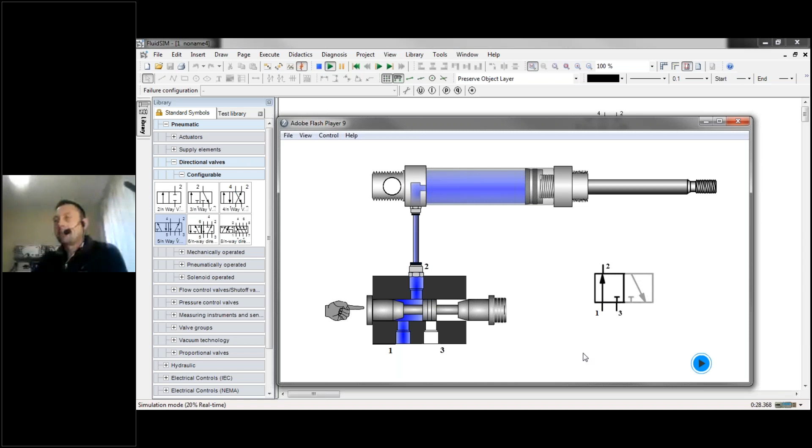Okay, so now once we let go of the button, we block the pressure port and we connect number 2 to 3. So all the air in the back of the cylinder would exhaust through number 3 to the atmosphere. Okay, I'll play it 2 more times, just so that you guys can get a grip on it. There you go. And there we go. Okay, that was easy.

Any questions on the single acting cylinder, guys, on this little circuit that we've put together? Any questions? No one? No questions. Okay, fantastic. You guys are clever, eh?

So let's go for the other circuit. Let's go and have a look at another circuit. But let's first try another option here that we can add to this double acting cylinder. We only have 1 more valve that we can try to see if that one actually operates as well. Let's see if we can replace these 2 valves with 1 valve to make it a simpler circuit. Okay, so I'm going to remove this, and remove this, and here we go.

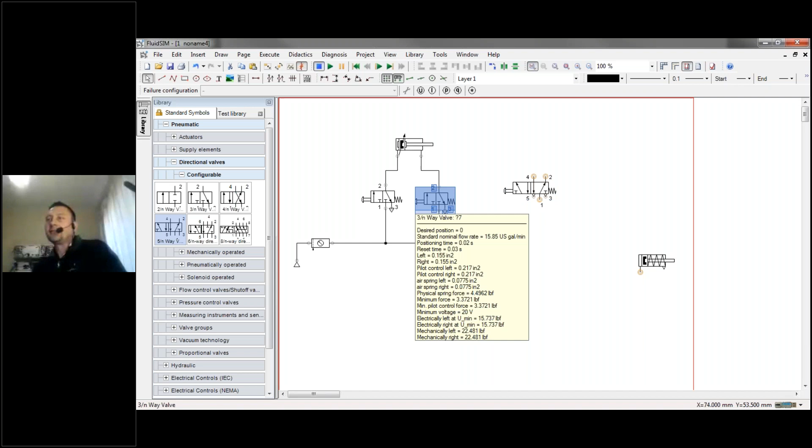Okay, so one of the working ports goes to the front of the cylinder, the other port goes to the back of the cylinder. Then we only have one port left, and that means that is the supply pressure. There we go. That's a new circuit. Okay, so this is now a 5/2-way. Previously, we've used two 3/2-ways. Now we're using a 5/2-way. So now we have 5 ports. And we also gave it a push button to actuate and a mechanical spring to return.

So let's play it, simulate, and see what it does. Okay, fantastic. The air passes to the front and the cylinder is waiting in the rear position. Okay, so once I push the button, it can extend. I connect port number 1 to port number 4, and that means the air passes through 1 to 4 to the cylinder to move forward. The front of the cylinder is automatically exhausted to number 3.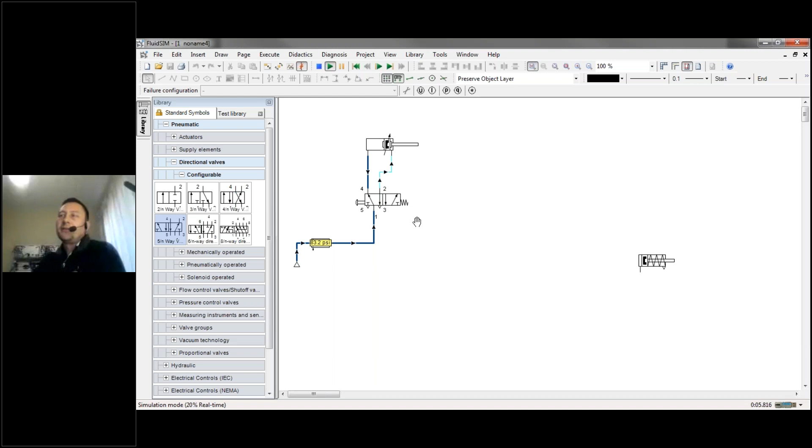If I let go of the button here, the spring will return the valve, and there we go. It pushes it back. So 1 is now connected to 2, and the air passes through the valve to the front of the cylinder, bringing the cylinder back. The air in the back of the cylinder can exhaust in at 4 and out at 5 to atmosphere. Okay, there we go. Another small circuit. Another one bites the dust.

Fantastic. Okay, guys, I want to show you another circuit, but are there any questions before I go on? Because I know it's all new, it might be new to you or not. Maybe you just saw it at work inside a factory or workshop, and maybe now you get to see the inside workings.

Okay, so for this valve, this is actually the simulation for that valve, the 5/2-way, and our double acting cylinder. Like I said, we connected the working lines number 2 to the front of the cylinder and 4 to the back of the cylinder. We have our button on the left-hand side here and our spring on the right-hand side. Okay, so 1 is our pressure, number 3 and 5 are exhausts to the atmosphere. Number 1 comes from the compressor and air service unit. Okay, so let's play it again.

There we can see the position changed and the cylinder moved forward as the air moved from number 1 to 4 to fill the back of the cylinder. The cylinder moved forward, extended, and the air in the front came out, and it exhausted from number 2 to 3, where the exhaust is. So the air went out back to atmosphere.

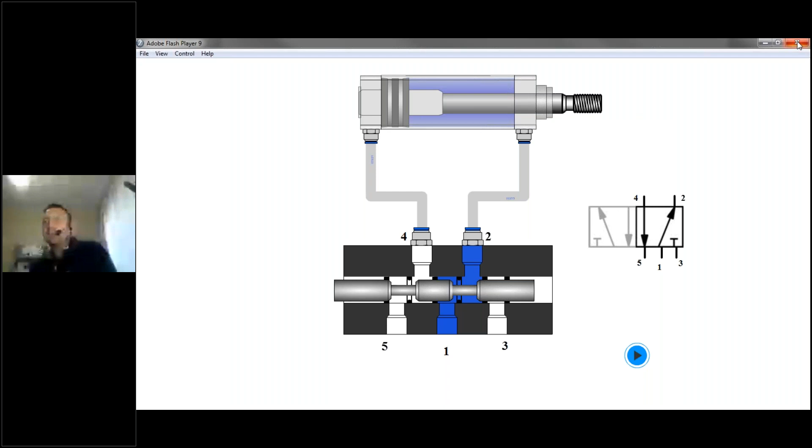Okay, so this is a great idea. We only have one valve for two positions, and we only have one button that we can use for 2 positions. But if we wanted to be a bit more manual and not bring it back automatically, we could give the valve a button on the one side, remove the spring, and give it another button on the opposite side. So there we go. Now let's see what happens now.

Fantastic. Okay, so the air went to the front of the cylinder, retracted. It's still in a retracted position. It's waiting there. Okay, I have a button on the right-hand side and I have a button on the left-hand side. Now because there's no spring on this valve, we call it a memory valve, because the valve will remember where it was the last time you actuated it into a certain position. There's nothing that will return it to its original position. There's no spring. So this is called a memory valve.

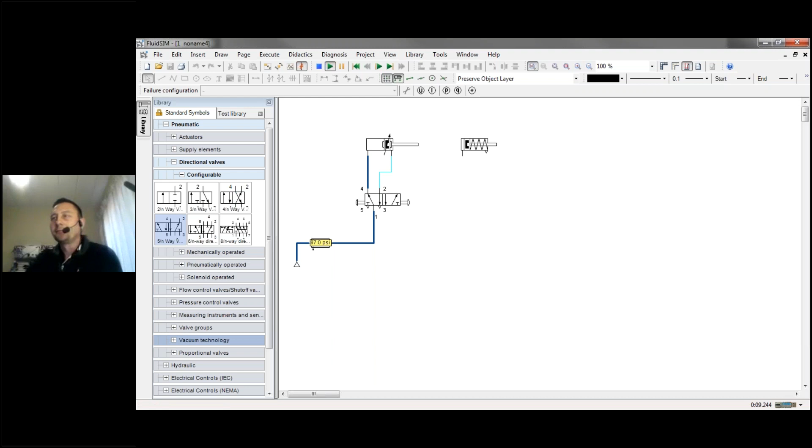So let's push the one button on the left and see what happens. And there we go. It extends and it's waiting there. You see, it's a memory valve. It's waiting for you to tell it to come back and to return. Okay, if I push the other button, there we go. We change the direction again.

Okay, fantastic. So guys, that is just the basics I wanted to show you about some of the cylinders and some of the valves. You need an air service unit and a compressor. Your compressor supplies the compressed air. It goes to the air service unit for cleaning purposes, and then the clean air goes to your system, through your valve to your cylinder.

And remember, we use these cylinders to do work. Instead of you pushing something in place and taking it back out, or putting a component in by hand, the cylinder could do it on your behalf. Okay, so there we go.

Is it possible for you just to explain the internal cushioning of the cylinders again, if you've got a simulation there? I have a question from Jason Marie. Okay, I'll play it again. Thanks for the question, I enjoy questions. Charles, do you have it? Yeah, I do have it. I have a cushioning here. I'm going to bring it in now. Here we go. So what was the question? Remember, cushioning is not speed control. Just if you can go through the simulation again, just to review it. Yes, please.

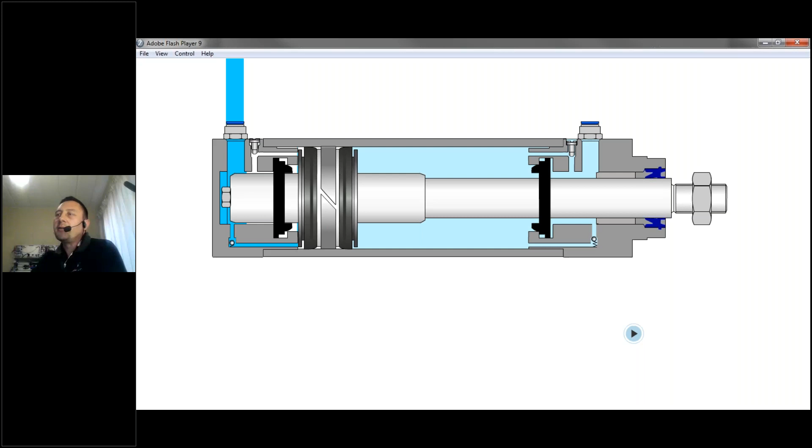Remember, this is just a simulation. It's a very short cylinder, this one, and you can now think it is speed control. It's not, because the rod can be extremely long, and this is just right at the ends: when your cylinder reaches the front, almost at the end, and when it reaches the back, almost at the end. This is a very short rod, just for simulation purposes. So let's do it again. Going back, impact damage. Going forward, cushioning.

An air cushion, high pressure, being developed in the front so that the cylinder moves slowly forward.

Okay, I hope that answers the question, guys. If it doesn't, please tell me so that I can. Yes, no, thanks. Thank you, Charles. Jason said that it answers his question.

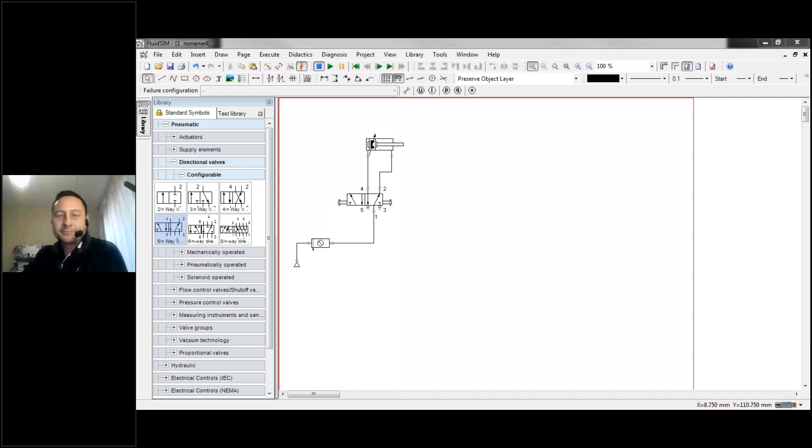There's just one question I answered earlier. Olusegun asked why there is consistent moisture in the compressed air despite having all these elements in the air treatment plant. I explained that as the air gets compressed, it builds up heat, and because of the temperature there is more vapor, water in vapor form. But as the air leaves the compressor and cools down, the vapor then condensates.

So condensate forms, and that is why you would like your dew point temperature to be as low as possible, so the air does not reach that dew point temperature in normal ambient temperature. But it's very difficult unless you've got very effective coolers. Normally some condensate forms, so before your application you want filters to get rid of all available water.

Olusegun, I hope that answers your question better. Charles, anything else you want to add? Yeah, just remember that the compression and release of the air happens extremely quickly, so there will definitely be condensation developing. There are so many revolutions within a compressor, thousands of revolutions, so it's very quick, and therefore there will be some condensation.

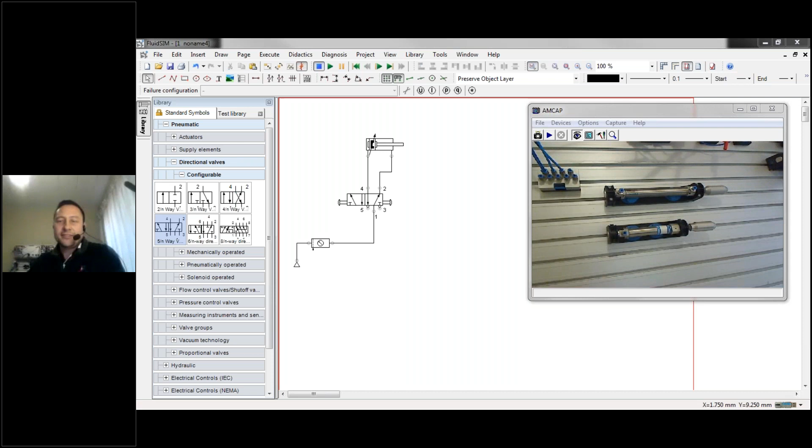Charles, he says the usual problem they face in the factory is moisture in the compressed air. What can we do to correct this? Well, I think first the sales engineer should come and do a visit there, do an overall overview of the factory first. And then I'll just quickly put my other slide on again to give him some tips here. Let's quickly see, I'll go back to another slide.

Olusegun, while Charles is looking for the slide, like we explained, there is an increase in the temperature of the air when it gets compressed. So you will have vapor or water in vapor form as it comes out of the compressor because the air is still warm. So down the line you will probably have an air cooler, which will cool down the air, causing the water to condensate, and then you can get rid of that water.

But if you don't have a water cooler or air cooler, as the air cools down later in the line there will be some condensation, and you will have to get rid of that water by means of either water separators or filter regulators. That is a common problem, and you have to install the correct components to get rid of that water. Charles is showing you something, so you can have a look there as well.

Okay, so you need to make sure you have a cooler after your compressor. You also need to make sure you have a dryer - if you can afford a dryer, then please get one, especially if you are in pharmaceutical or FMCG, fast moving consumer goods, or a very precise factory where precision is key. Then the class of air would be different, meaning you need a lot more protection and ways to get rid of the moisture in the air.

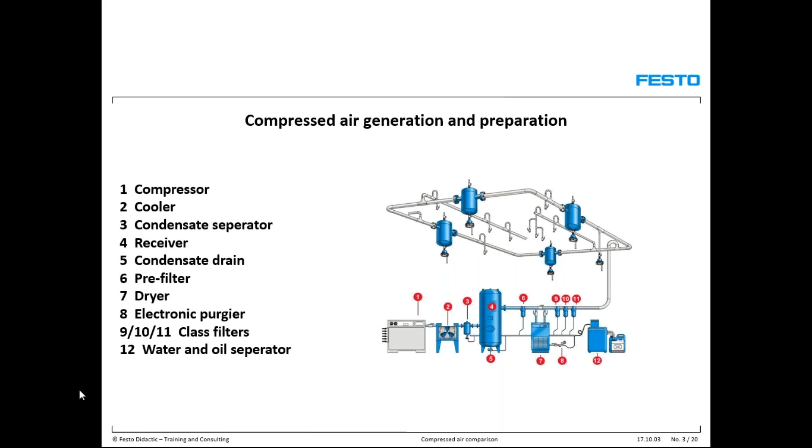Does that answer the question? I think it's very important what Charles said - I think it's important to get the sales engineer or someone out to your factory just to make sure the design is correct. Because also your filters could be too big.

If the airflow through the filter is not high enough - let's say you've got a 1/4 inch line, but your air filter is actually a 2-inch or 1-inch design - that means airflow through the filter will take place, but the air speed inside the filter will not be enough, which will have the effect that the centrifugal force of the air will not be enough because of the air speed, and then you will not be able to get rid of the water. So there are a lot of factors to take into account when you've got water in your air lines, and how to get rid of it. The best way is to get into contact with a sales engineer or distributor and let them assist you. All right, thank you.

Okay, any other questions? Just want to show some dryers, that there are different types available. Just seeing it's loading... Okay, it seems the PowerPoint does not want to open now. Are there any other questions while I'm looking for that? Trying to open my other PowerPoint presentation.